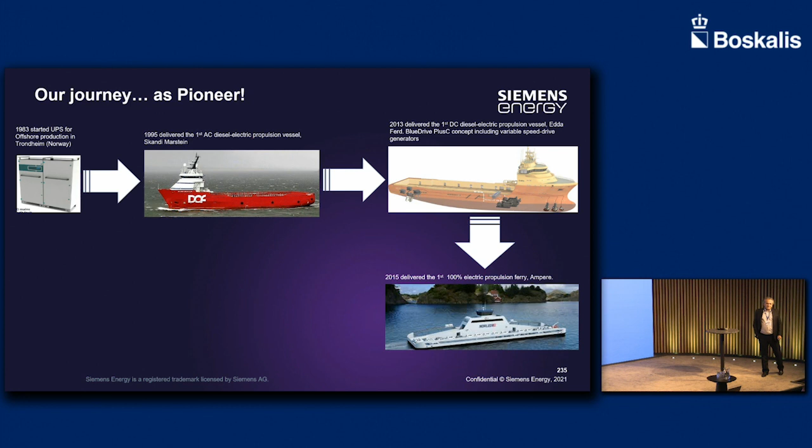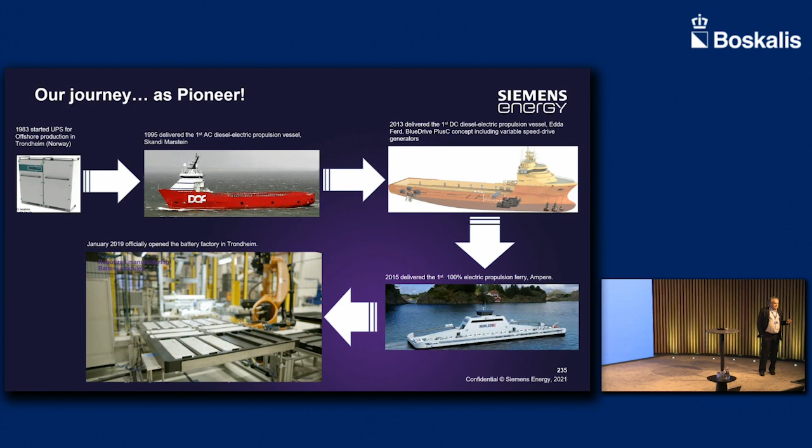We were again pioneers with the first 100% electric ferry, called Ampere, in Norway in 2015. And after that, it's not pioneering, but we opened our fully robotized battery factory in Norway. This battery factory is for batteries that are 100% water-cooled. The only thing that we buy outside are the battery cells, coming from China and South Korea. All the rest, the packaging of the battery modules, the battery racks, and all the grids that we deliver are made by Siemens Energy.

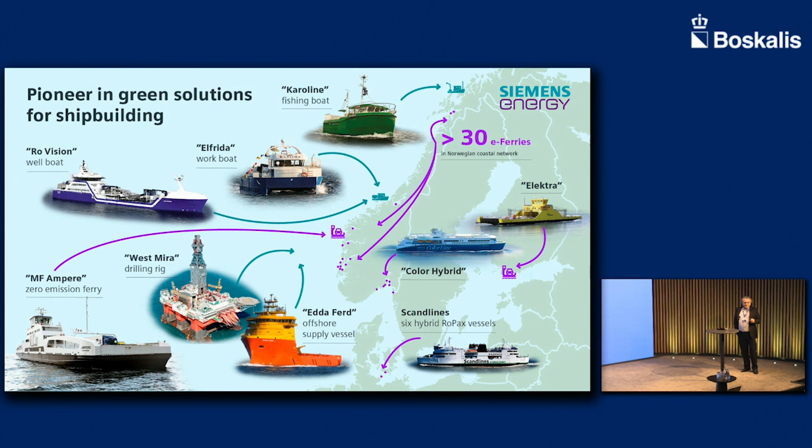We have also been pioneers in other ways with regard to shipbuilding. We were the first one doing a 100% electric fishing boat, Karoline, and the first electric workboat, Elfrida. We were the first one doing the Ampere, and again the BlueDrive PlusC with Edda Ferd. We started the journey in 2012 hybridizing the ferries for Scandlines. We also did the first hybridization of an offshore drilling rig with power notation. And we have also done wellboats, the Ro Vision, with DC propulsion and batteries.

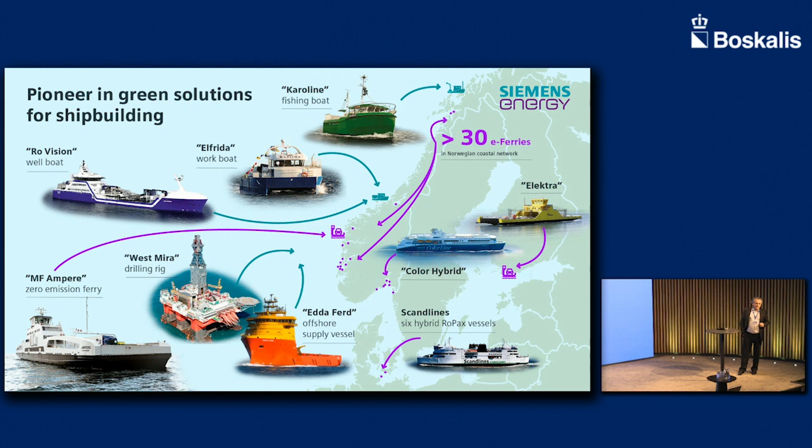Then, the question everyone was asking: why did you open your own battery factory? There were others, and we were buying before from third parties. The answer was very easy. Safety conditions were not according to what we mean safety should be. I can give you an example of an air-cooled battery energy storage thermal runaway. Thermal runaway is the worst event that can happen with batteries, when the batteries catch fire, basically. You see, this is air cooled.

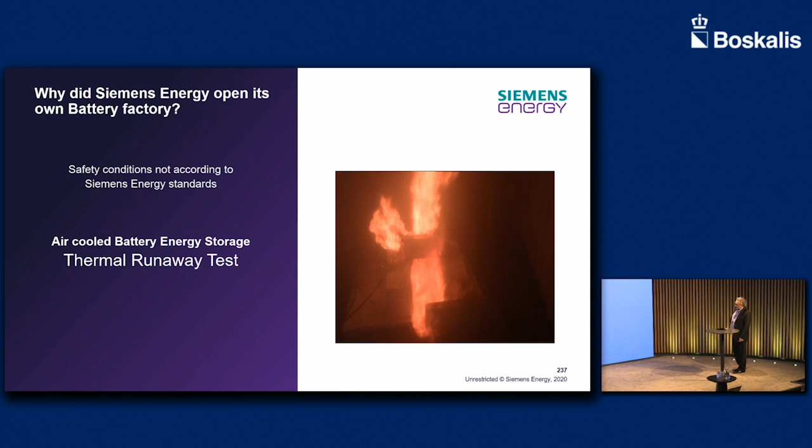This is the burning of a single cell. So you see what a single cell means and how much energy it releases. And you see that it's not self-extinguishing. It's not to scare anyone here, but we have to be aware of the risks, and therefore we know how to manage them.

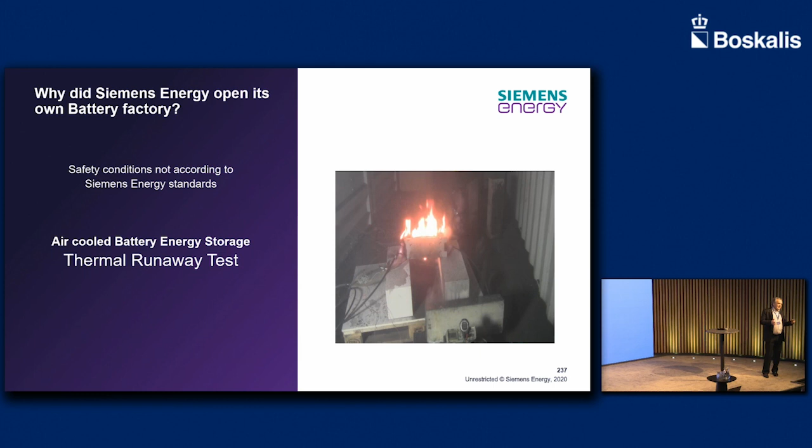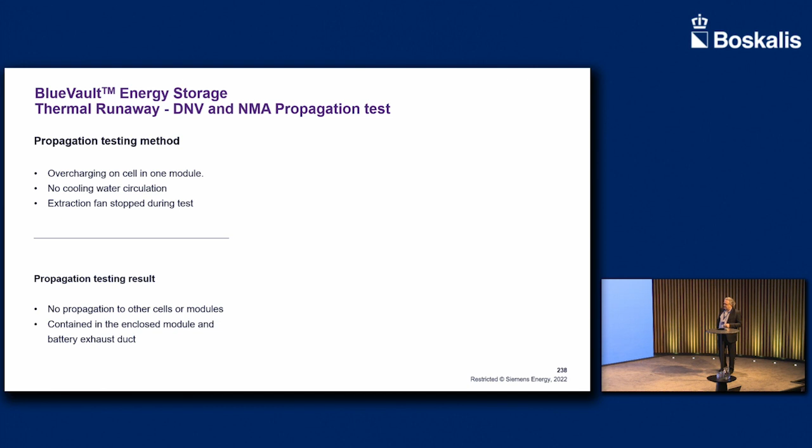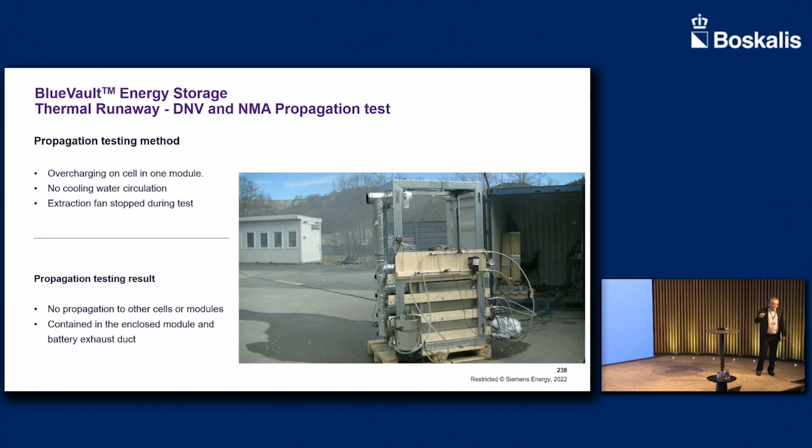We did a similar test with our batteries: overcharging one cell in one module, stopping the water circulation, because these are totally water cooled, and also stopping the extraction fan for the gases. As you can see here, there was no fire, no propagation to other cells, and the gases were conveyed into the exhaust pipe that we normally have in our system, which conveys the gases out.

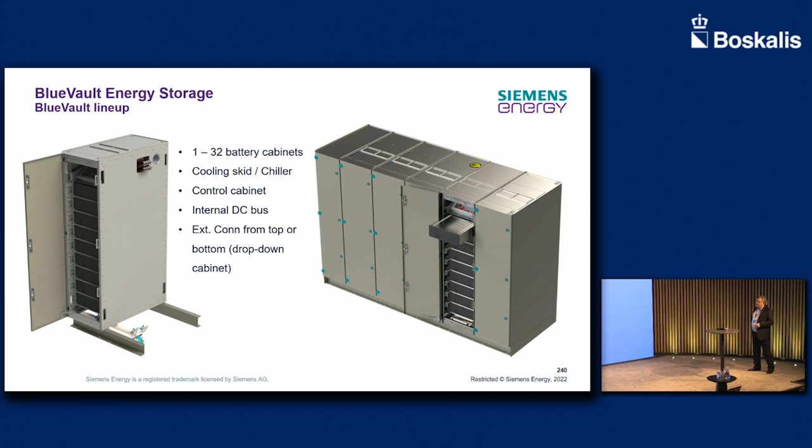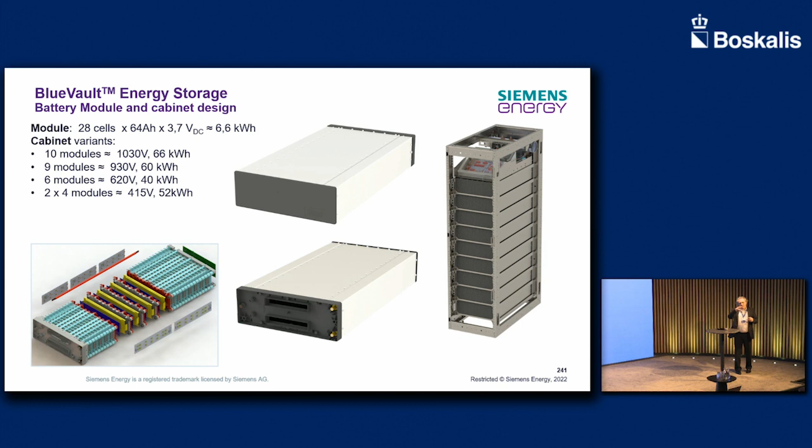This is one module that is expanded. You can see very well that the yellow ones are the battery cells. The water flows in between all the cells, so in a way the cells are naturally separated by water. So meaning that also if a thermal runaway happens, the water will take care of that, so will extinguish the fire. The water makes it also possible that you can have, let's say, equal degradation of batteries, both from the first to the last one and from left to right. So you have a constant degradation of all the batteries. So this means that also the lifetime will be at maximum.

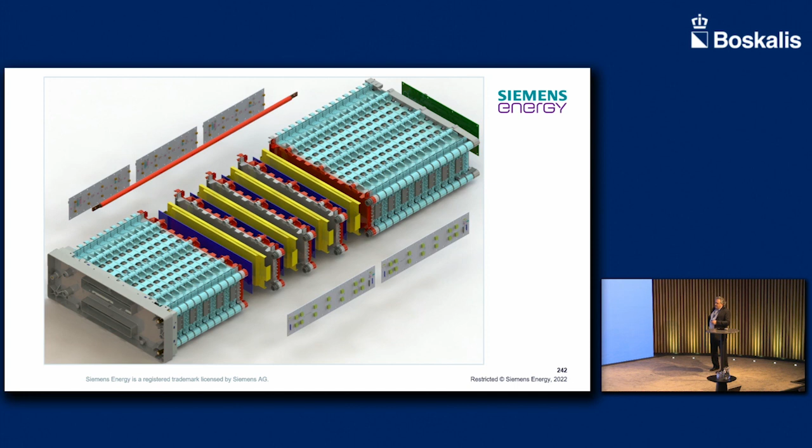You see also all these cards here. All these cards here are sensors that we do have for monitoring temperature, humidity, state of charge, state of health, and these are based on a single cell level. Because as I said, for us, safety is the most important thing.

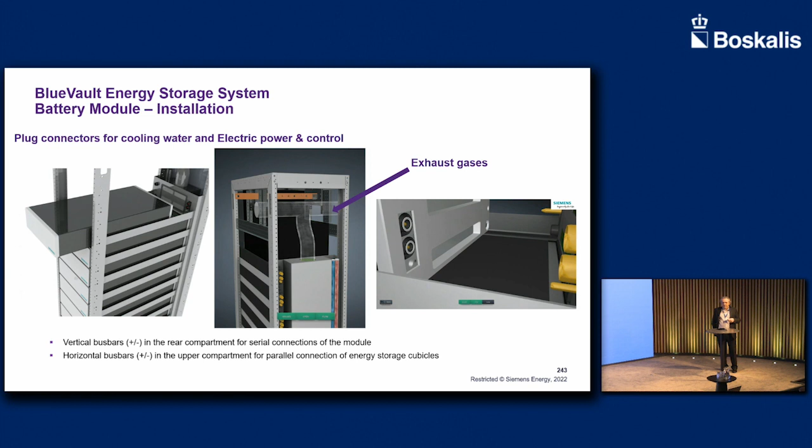You see again the backside of the switchboard of the battery system, where all the exhaust gases can be collected if something happens, and these are led into fresh air. So meaning that you can stay in the battery room eating, having dinner inside. There will be no problem also if a thermal runaway happens.

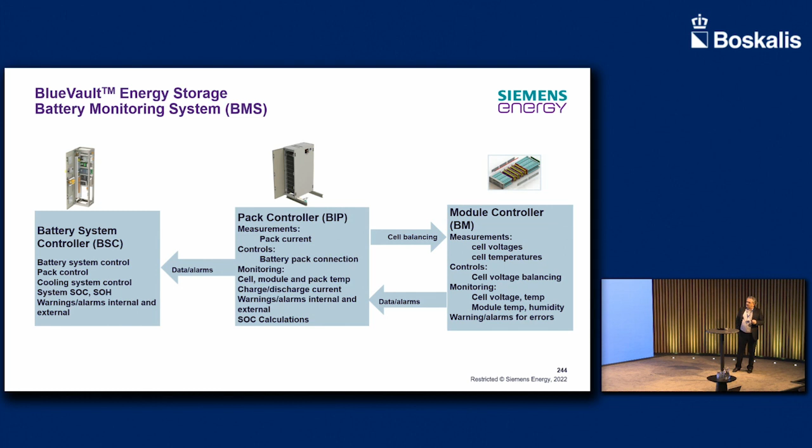Yes, and you can see also the battery management system that we do have from a cell level, where temperature, voltage, voltage balancing, humidity, and all the alarms are controlled. These are wirelessly connected to a BIP that is on the top and can instantaneously disconnect the entire battery rack. And then from there, all these battery racks are hardwired, constituting, let's say, the battery system that we deploy.

Most important is that, as I used to say, maybe someone heard from me today, batteries are stupid because basically they are on or they are off. What makes a battery intelligent are the frequency converters. So if you don't have very good grids and very good frequency converters, you can have the best batteries in the world. This will not, let's say, help us.

In the same factory where we manufacture the batteries, we do have also the frequency converters. We have both AC/DC bidirectional chopper and grid forming converters, as well as DC/DC. And you can see what is the specialty of those. You can overload them up to 50% for 5 minutes. So it's quite huge, the overcharging that you can get with those.

When we do DC grids, we do have DC-DC converters, and we do have also the switches. We have a switch called ILC that makes it possible to have a closed bus operation, also in DP3 closed bus, because that switch can disconnect and segregate a failure in the ballpark of 7 microseconds, while, just for your understanding, a normal mechanical switch operates in around 100 milliseconds. So there are two different worlds in between.

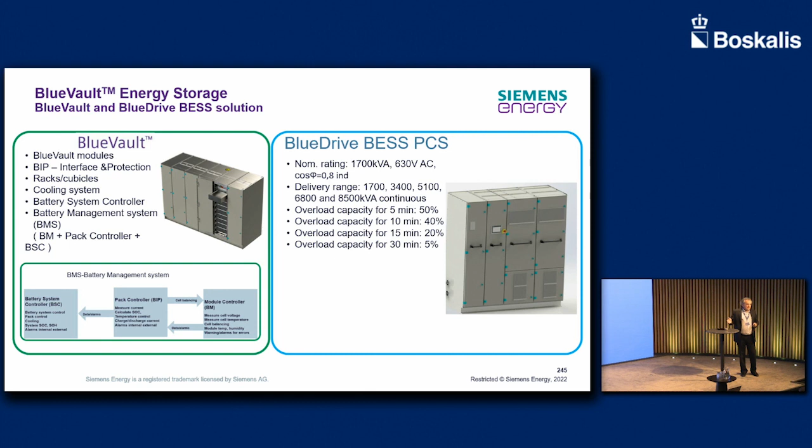Lessons learned. The first lesson learned is that for the greenfield, the BlueDrive PlusC technology with the batteries provides higher availability, reliability, and profitability of the assets. Because as I said, with the variable speed generators, lowering the number of generators online according to the load already gives the ship the possibility of lowering the fuel consumption. When we have the batteries on top of those, we can lower it even more because the batteries will stay there for spinning reserve and eventually peak shaving when needed.

In the retrofit, because we are doing also retrofits, we have done the retrofits while the vessels were still in operation. So you don't have to take vessels out of operation or do it during planned maintenance. So this was important. I remember the colleague from Gusto mentioning that this might be a potential, let's say, problem.

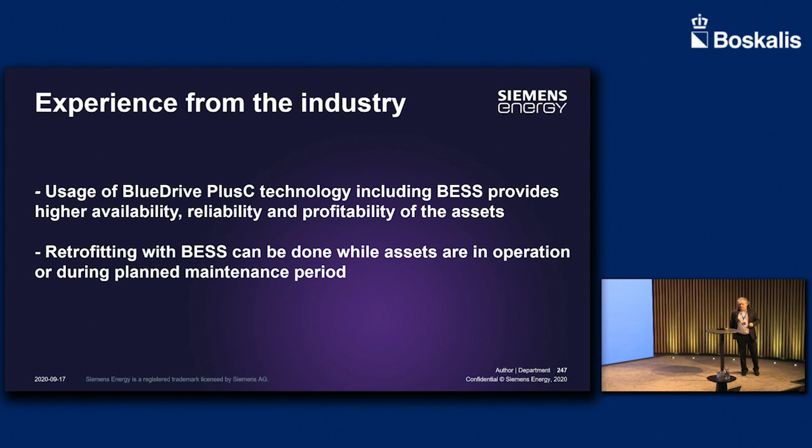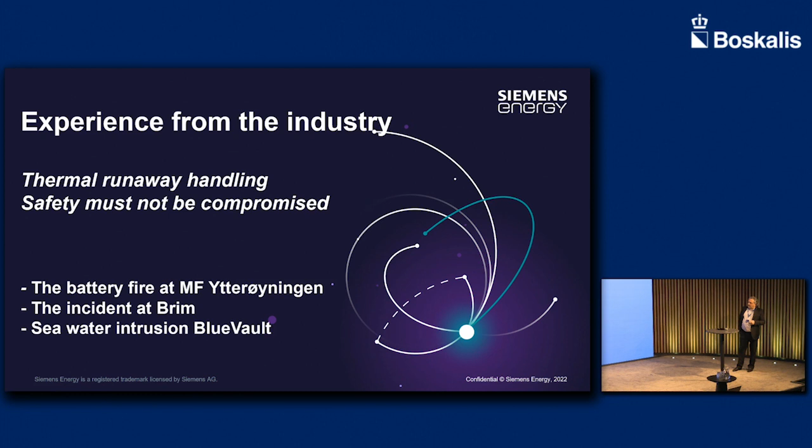Another experience is, as we saw also before, the thermal runaway. So safety should not be compromised. And it's not a matter of money. A lot of time we talk about how much the batteries cost, this battery compared to the other and whatever. I used to say, what happens if something happens and how much it takes to repair something. There are 3 cases here: what happened on 2 ferries in Norway and what happened also to our system.

The first was a so-called water-to-air cooled battery, so it was not 100% water cooled. What happened on this vessel is that, we will see after, the batteries were not used too much, and they went in a kind of snooze mode. And then all the system, the alarm system, was in a way also sleeping, so not online.

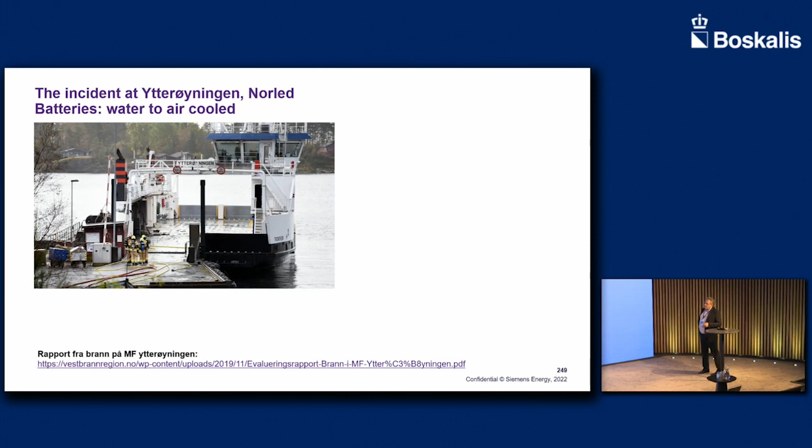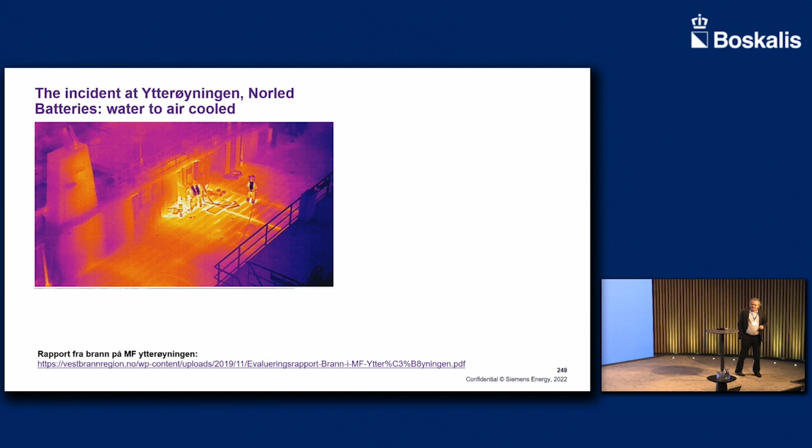There was a thermal runaway generated. On the vessel, there was a fire. This is how the vessel looked with the thermal camera. So it's not something that we can ignore when we talk about price; we have to take this into account if it happens. And here you can read what happened there.

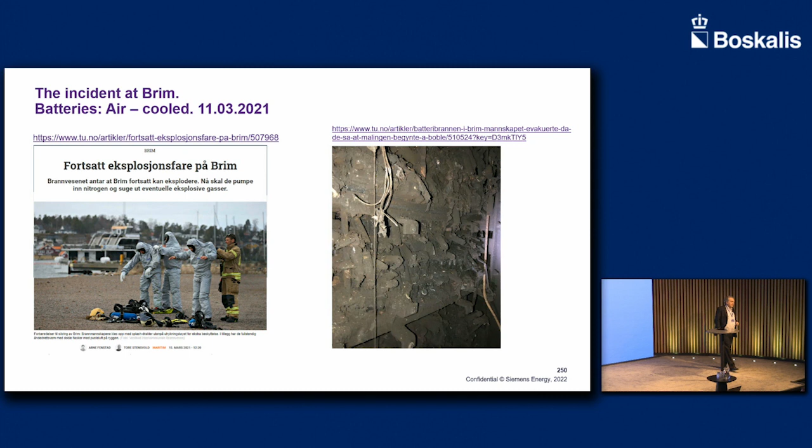The same happened for another smaller ferry with air-cooled batteries, and you can see the result of the thermal runaway that was generated from that. We have also had an incident with our batteries, with the BlueVault. There was an intrusion from this exhaust pipe in the main deck, the one in red that you see. Water came in because there were high waves, and therefore salt water came inside. This salt water went into the batteries, and of course the batteries were affected by that.

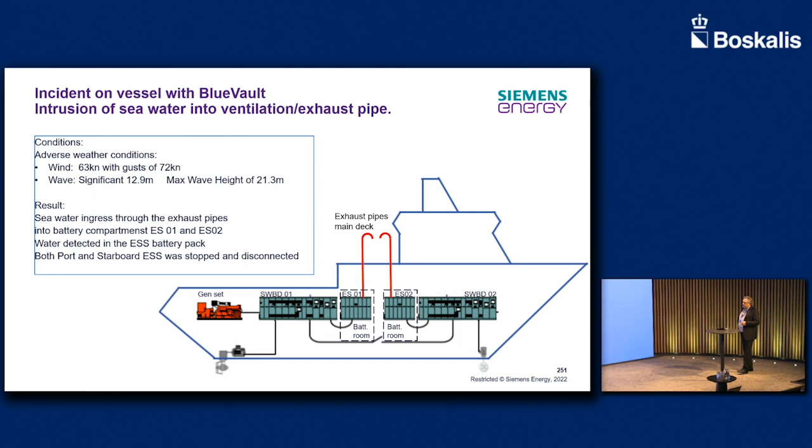The good part was that, with lessons learned after the owner looked into it, it was detected that the problem came from a wrong design by the yard of the exhaust pipe. So that is the good part, at least from our side. But the good part was also looking into our batteries. There was a fault on 3 modules, an arc flash was generated, but no thermal runaway, no fire, no explosion. The vessel continued operation. We changed the affected modules while the vessel was still more or less in operation without the batteries.

And this was, in a way, showing again that maybe you can pay something more. We know Siemens Energy has never been cheap or the cheapest in the market, and I think that's not our goal, but we want to be the safest in the market.

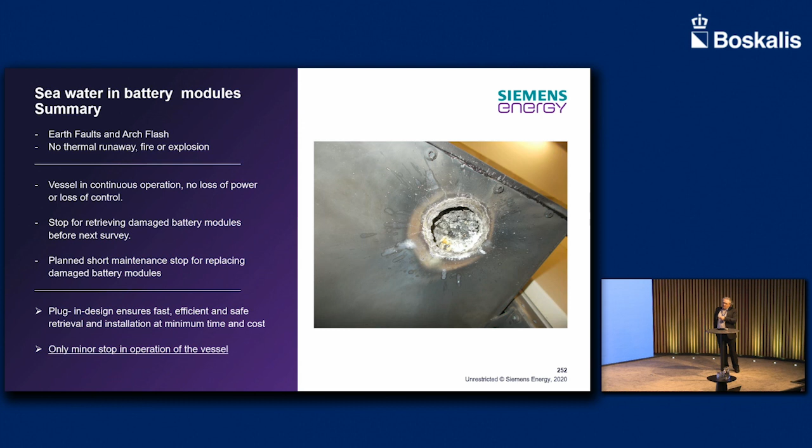About the future, quickly. We are working, as I think quite a few are, with fuel cells. We have the first contract signed with Sanlorenzo, which makes luxury yachts in Italy. We have also deployed, just for your information, for Edda Wind, a lot of vessels that are hydrogen ready, and there is also an EU research program for using a blended fuel, the LOHC, so that you can carry the hydrogen without any problem and you can burn it.

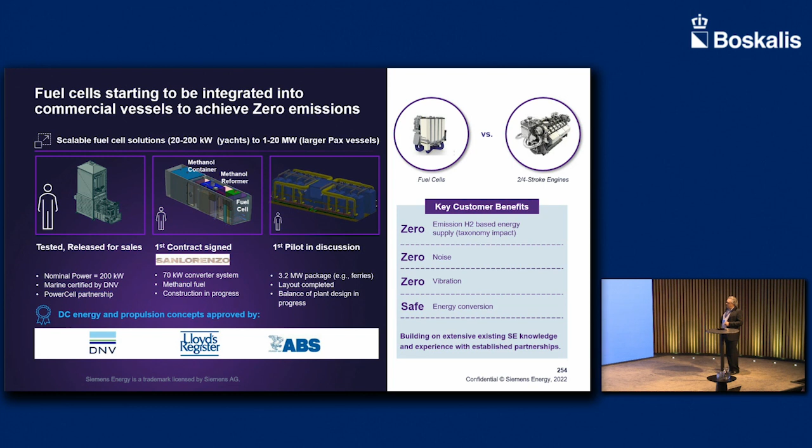And we have talked about how 90% of vessels are bigger vessels for longer duration. So we have 17% lower cost per unit, 90% reduction in SOx emissions, and also 7 to 10% increased capacity with a smaller footprint. So it means that you can transport 7 to 10% more goods if you want.

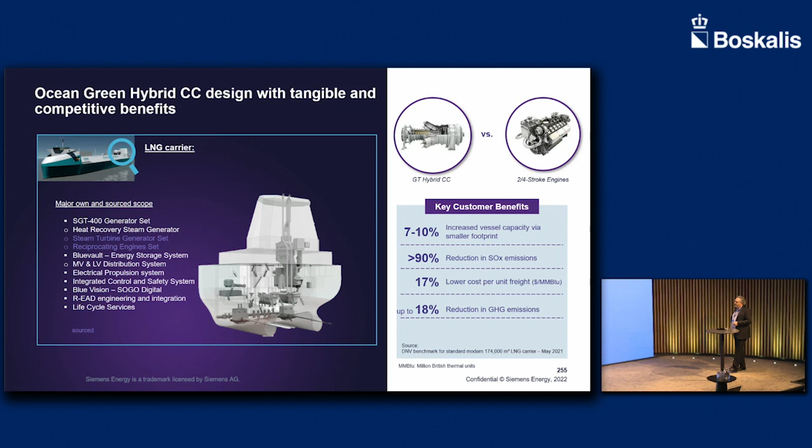The last one is also what Øystein touched on a bit. We have also been looking at having vessels charged at sea, which can be done with bottom fixed, but also with floating. Basically, in that regard, we have been developing solutions. One is called Blue Wind for the off-grid market, which we have been offering and doing a lot of studies on, where batteries are already included for other purposes and can also be used for charging the vessels. And we also have a solution that we previously called Blue Wind for grid plus storage for wind farms.

People were asking me, okay, wind farm, and you need batteries? Why do you need batteries for a wind farm? My answer is very simple. With the introduction of renewable power and the fact that there are fewer and fewer rotating masses on land, you will have a lot of imbalances on the grid. Therefore, for fast frequency response and voltage control, for grid congestion, or if you want to do arbitrage, you will need different types of batteries. One of the best places to put them is out at sea, because then you use less space on land. And part of those can be used for charging the vessels, or the CTVs, making those fully electric to go back and forth.